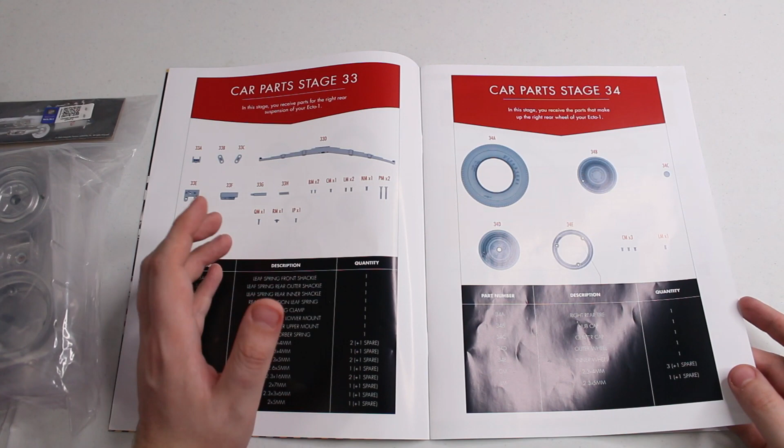Okay, so we've moved over to the build table here, and once again today we're going to be finishing off issue number 10 of Eaglemoss Hero Collector's 1/8 scale Ecto-1 with stages 33 and 34. We've already done the left suspension and the left rear wheel. Today it's all about the right hand side, so at the end of today's video we're finally going to have 4 wheels on the Ecto-1. So let's go ahead and turn a few pages here.

Stage 33 here, so let me go ahead and grab the pieces for today. I've actually already unboxed or unbagged stage 33. Let's go ahead and remove all the little screws here, and let's get to building today.

Like I said, for the most part we've already constructed all this stuff before in our previous video when we did the left rear leaf spring, but we're going to continue today. Once again, we're doing the right hand side here.

So our first step, number 1, is fitting the shackles to the leaf spring. Let's go ahead and find said shackles here, and looks like we're going to be fastening the first piece using some LM screws. So let me go ahead and find those. Oh, there you go, LM screws. And with that, both the LM screws are now in place there for that.

Going on to figure B, we're going to be attaching the other shackle. This one's a little different here because these pieces are separate - the other side was just one large piece. So for these 2 small pieces here, we're going to be attaching those using some PM screws. Okay, so we got that screw now in place. And correction, it was actually only 1 PM screw that we needed to fasten those 2 shackles in place there.

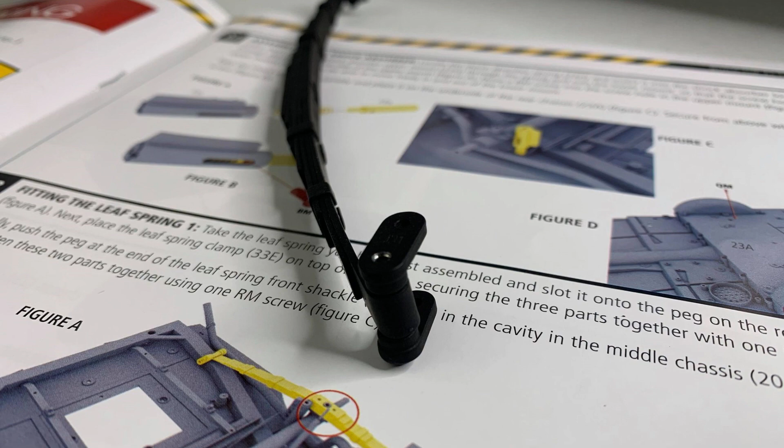From there, we're going to move on to step number 2 of stage 33, assembling the shock absorber. Once again, this is kind of retreading what we've already done here.

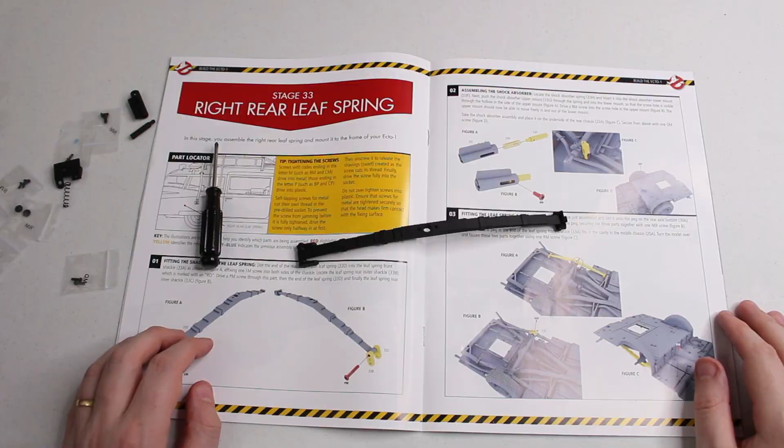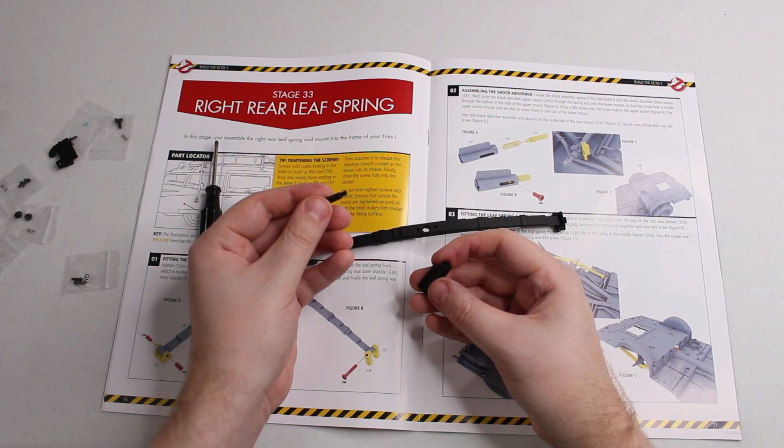Put the little spring here in this piece, and then we grab this little guy, the shock absorber upper mount, and we're going to be pushing it right in place through the spring. All springy and such. We're going to fasten everything in place here using 1 BM screw.

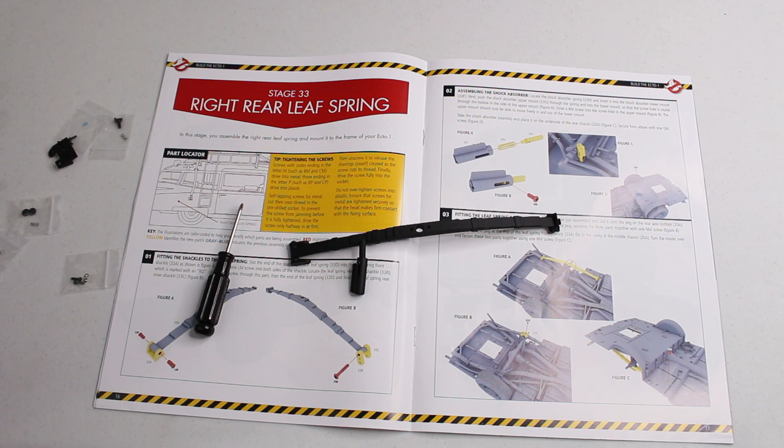And there we go, shock absorber is shock absorbing. From there our next step is actually attaching it to the back end of the Ecto-1. So let me go ahead and bring in the Ecto here. Okay, so for the shock absorber, it goes in like a little hole right here. Now, for anybody that checked out my last video, I initially put the absorber in the wrong hole, like one that was right next to it.

So luckily, I'm not going to do that. I learned from my mistakes. So give me a second.

Let me put this in place here, and we're going to screw it in place using one GM screw on the other side of the Ecto. So give me a second, let me pop it in here.

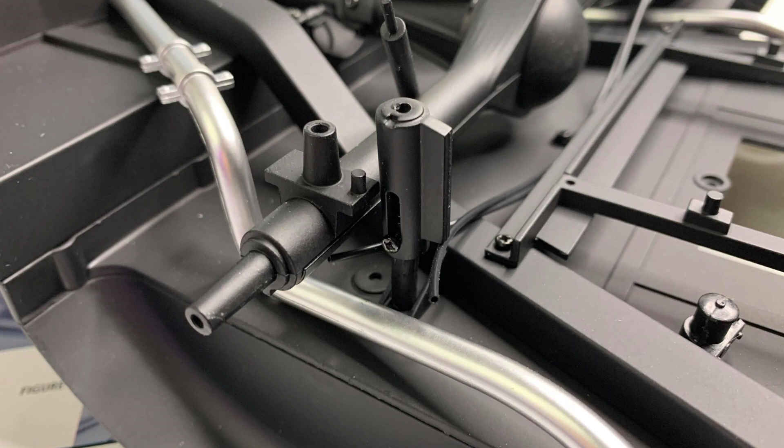Shock absorber is in place, which brings us to step number 3, fitting leaf spring number 1. We're going to take the leaf spring, which we've already pretty much constructed, and put it in place much like we did on the left-hand side.

Okay, so got a bit of a rough fitting there, and for our first step, figure A, we've already got that in place. We're going to grab this additional piece, the leaf spring clamp, and put it in place much like we did on the other side. There's a couple little holes in here, fits right into the grooves.

And we're going to be securing these pieces together using one NM screw. Now that wasn't such a chore, now was it? So we got the NM screw in place.

From there, we're going on to figure C, which means we have to flip the Ecto-1 around, and we're going to be further securing this piece here using one RM screw. Okay, so that RM screw is now in place.

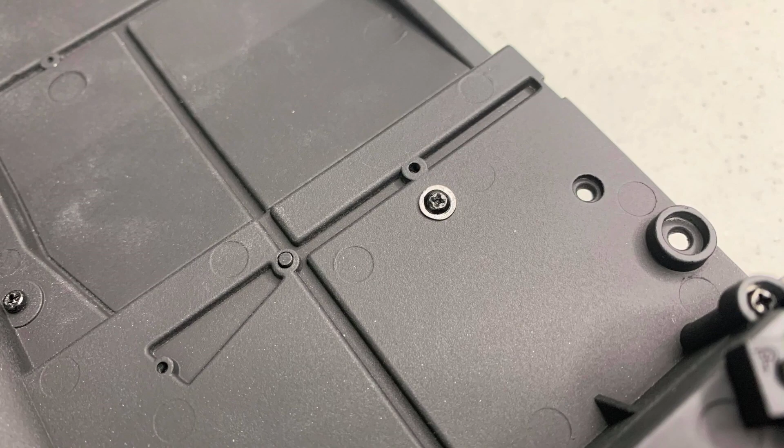Let's go ahead and flip the page here. Moving on to step number 4, fitting leaf spring number 2. Our first line of attack is going to be attaching the leaf spring here to the shock absorber using one CM screw.

So let me go ahead and get that done. Okay, so the CM screw is now in place there, so we're looking good. That is now all secure and really, really nice and tight.

From there, we're going to focus on the back of the leaf spring right here, and we're going to run one PM screw through it. Okay, so we've got the PM screw now in place.

After that, we're going to be fixing the right outlet pipe. For this one, we just put the little outlet pipe, the tailpipe, right through there, and secure it in place using one BM screw. Okay, so we got the BM screw now in place. That's looking nice and secure.

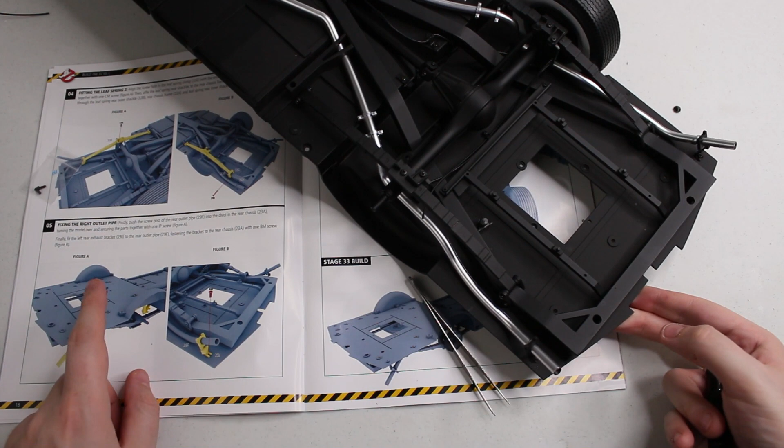Kind of secure. Actually, I understand why that's not secure right now, because I somehow skipped a step here. Part of Part 5 was once again attaching this right outlet pipe holster. There was actually a screw, one IP screw, that's supposed to go on the other side of the Ecto-1 to secure this pipe into place, much like we already did on the left-hand side. So we got the IP screw now going in on the other side, and that brings step number 5 to a close.

Okay, moving on here, we've got part number 6, which means we're getting to the end of stage 33. This next part is going to be fitting the hoses.

The first part here is pushing the ends of the two brake fluid hose parts into the pins, which, if you remember from our last build video, were just kind of dangling, left idle. So let's go ahead and secure those into place. Both hoses are now in place there. Yeah, everything's looking good. I may go back and trim down some of those hoses, they do look a little long, but that can always be a job for another day.

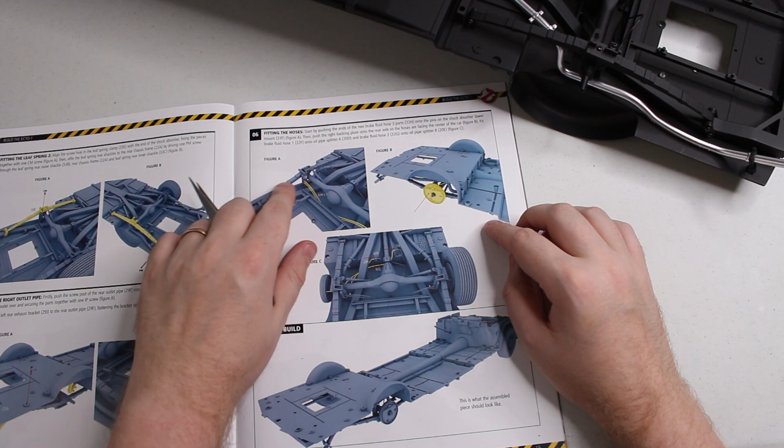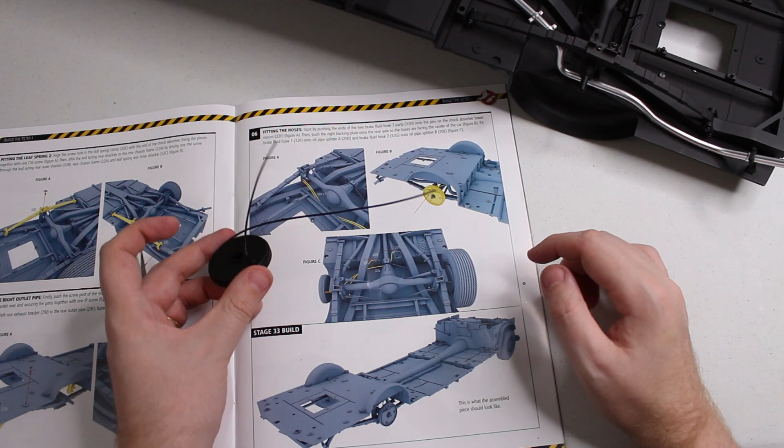Moving on to figure B: push the right backing plate onto the rear axle so the hoses are facing the center of the car. This was the beginning of the last tire on this Ecto-1, so let's fit everything in place. Alright, that's now in place, though not really secure yet - that'll happen in the next stage.

From there, we're going to run the 2 wires we just had, the 2 brake fluid hoses, into the oil pipe splitter. Okay, both hoses are now in place, and that brings us to the end of stage 33.

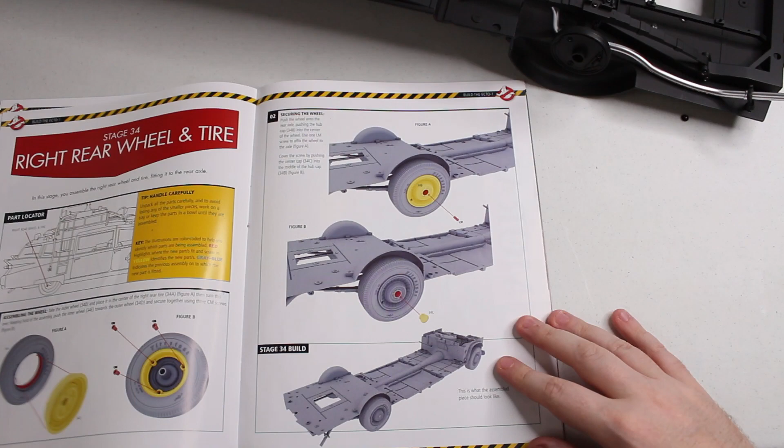As I said, the wheel on the side isn't really secure yet, which means that's going to happen in stage 34 - the build and construction of the final wheel of the Ecto-1. It's only about 2 steps, so let's finish off issue number 10, stage 34, right here right now.

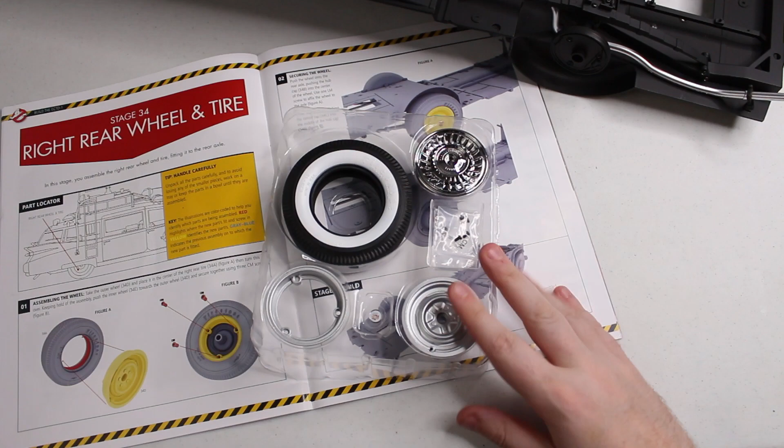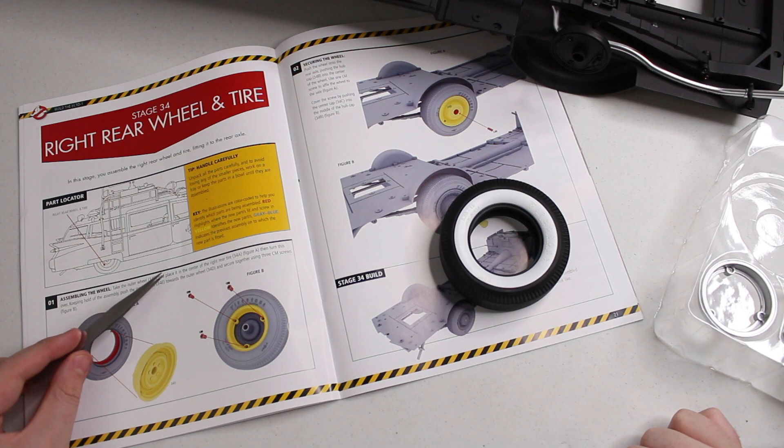Alright guys, bringing in stage 34 here, the final tire. Part 1 is assembling the wheel. Take the inner wheel, this big piece right here, and place it in the center of the right rear tire. We're just going to pop that right in there, put a little pressure so everything is nice and secure.

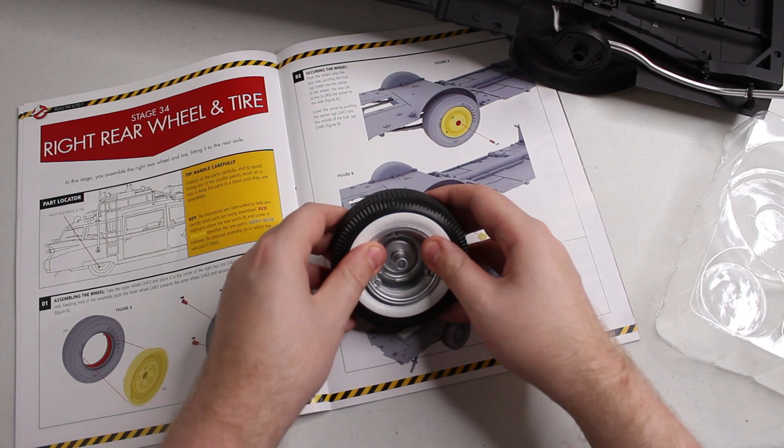From there, we grab the inner wheel, and as we've already done 3 times in the past, line up the holes, put a little pressure so everything lines up correctly and properly, and we're going to secure that in place using 3 screws.

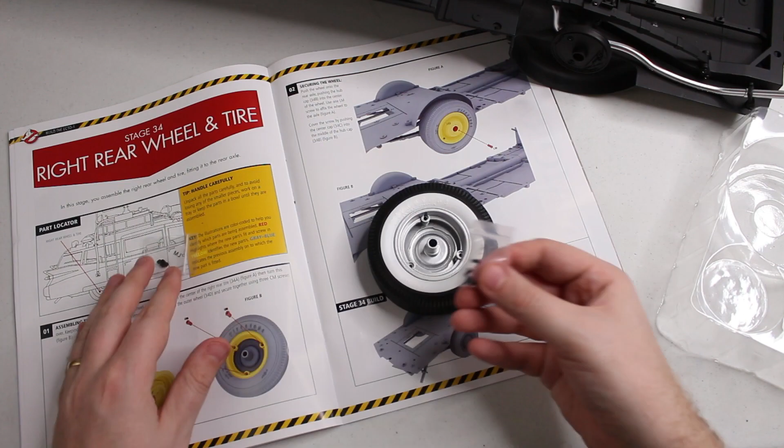My printing's a little off here - it looks like CM screws? Looking at what I've got, what do we got - LM, CM, yes, CM screws. Alright, all 3 screws are in place there.

After that, we just grab the hubcap and pop it right into place. Just line up the little nub on the tire, make sure - there we go. Got a nice secure fit there. Now that that's in place, all we have to do is put it on the Ecto.

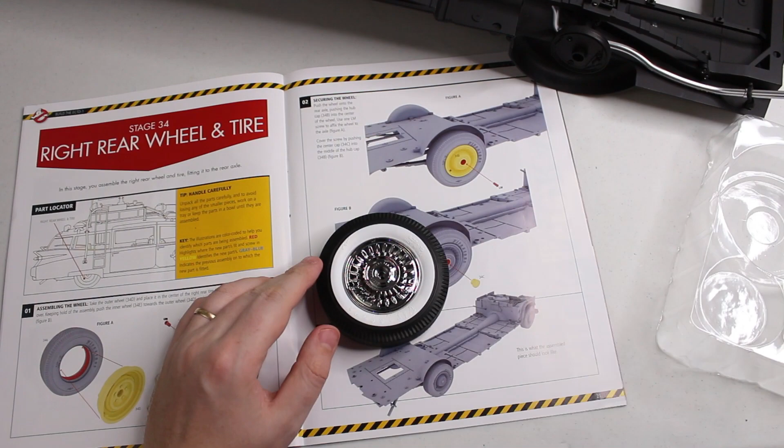Alright, we got the tire here. Let's go ahead - there we go, found the sweet spot. Now all we've got to do is put one LM screw deep in there, screw it into place, and we've got ourselves a 4th wheel here on the Ecto-1. There we go, cool, so that's now in place.

Now we're just going to cover up that screw with the center cap. Just goes right on, pull a little pressure, and there we go guys - the 4th wheel is finally in place on the Ecto-1.

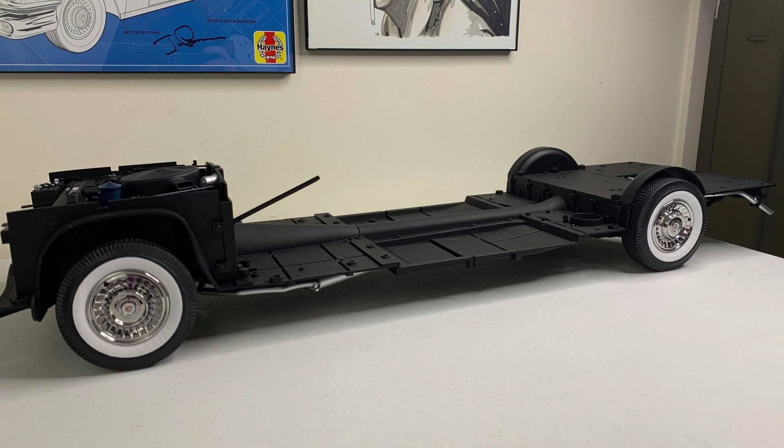So with issue 34 now in the bag, I thought it'd be time to give you guys an update on the overall scale of this thing. Now that we have all 4 tires on it, I mean, this is huge.